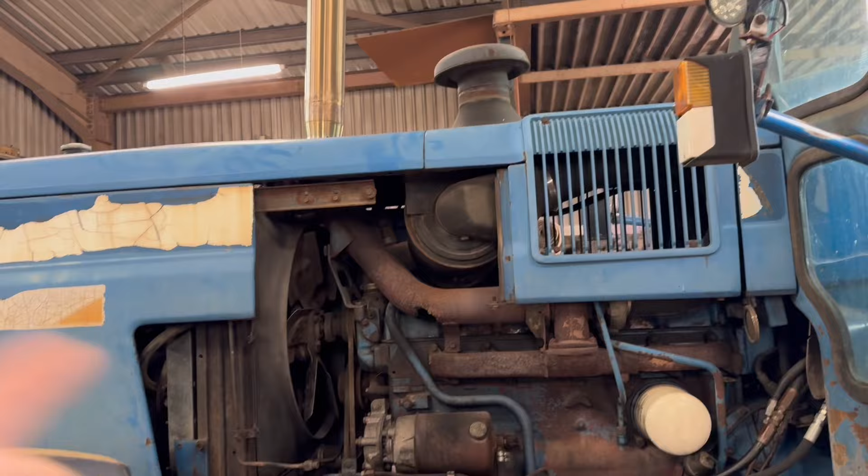So yeah, we'll try and get this off first. I warmed it up at the back. It won't come undone. And I've also warmed the bolt up itself. Sometimes that breaks the rust free. It's turned a little bit, but I think it's just the head that's going to snap off. We'll keep turning it backwards and forwards, till it either comes undone or it snaps off.

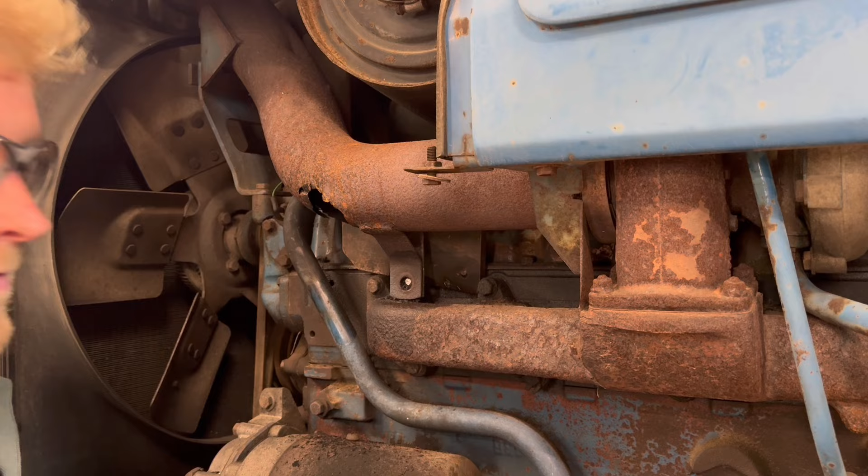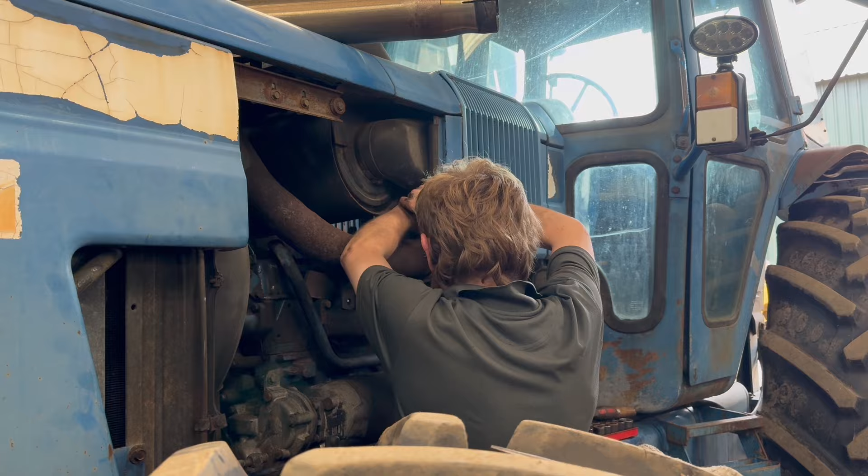Yeah, so it just snapped off. Right, so that's that off. So there's a V-band clamp that holds that on to the end of the turbo. And then 2 bolts there, and then the exhaust clamps on the top. So hopefully that new one should be the same. And then that just clamps onto there, onto the V-band.

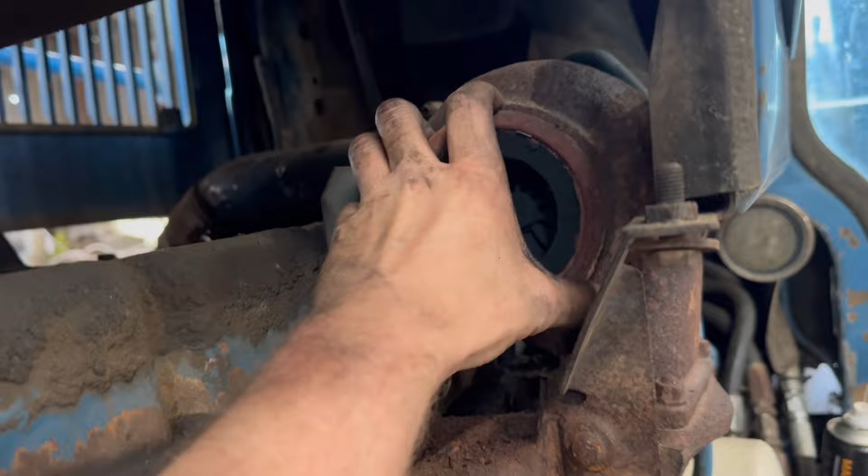I think the turbo seems alright. Bit of rust and stuff in the bottom of it. No wobble in it. Just wants a bigger one on. So yeah, I think we'll have to drill that out because it looks like it's now part of the manifold. It looks like it's that rusted in. So I think I'll grind it flat, centre punch it, and then just drill it and tap it back out again.

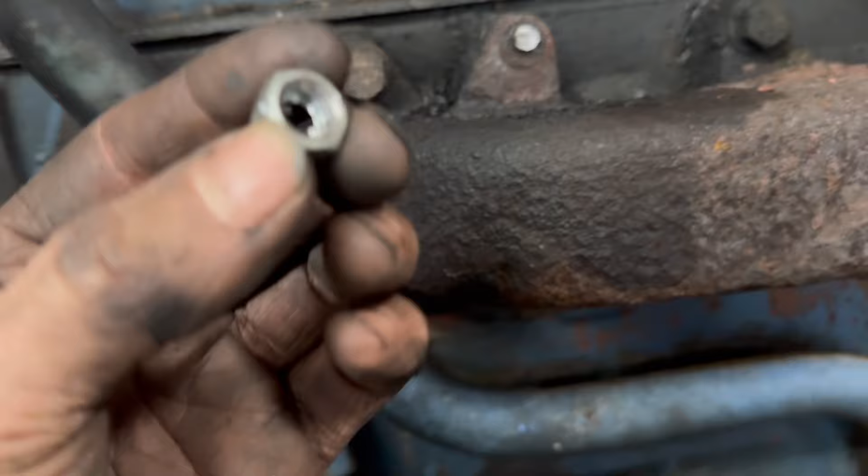Actually, before I go to the hassle of drilling and tapping it, I might just try the old trick of welding a nut on the end and then get this bit hotter and see if it'll come out. So I've just drilled and chamfered the back of that nut out a little bit so it fits over there nice. Now some people weld the washer on first and then a nut onto the washer, but I'm just going to weld that onto there. And then get that bit nice and hot.

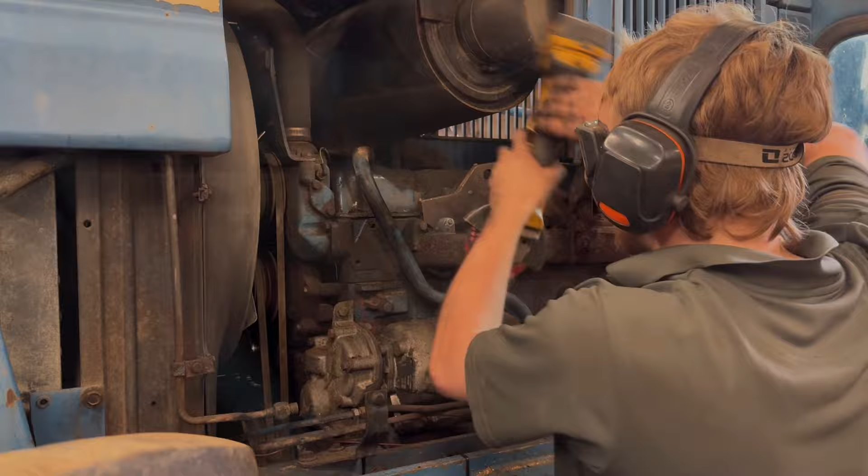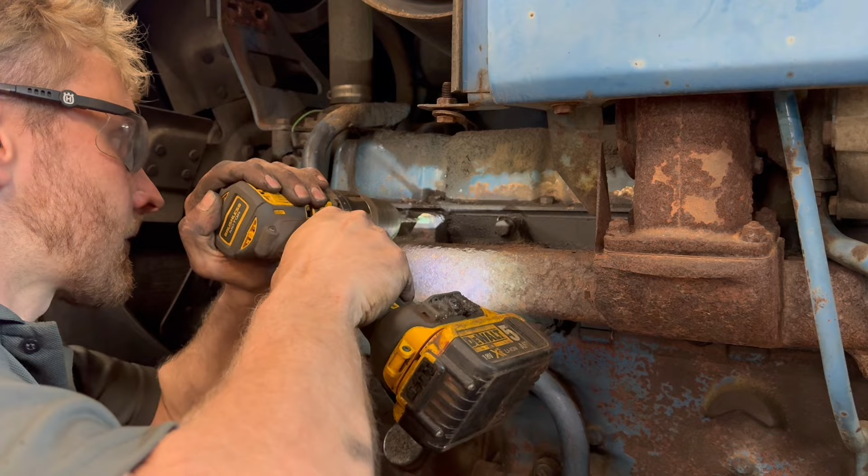Yeah, no, we'll just grind it off and drill it out. It's not going to come out. I think we managed to keep pretty much in the centre. So I went through with a 3mm to start with, and then I went 6.5 just to see whether I was in the middle or not. And now I think I'll go through with an 8.5 to tap it out to a 10mm, M10.

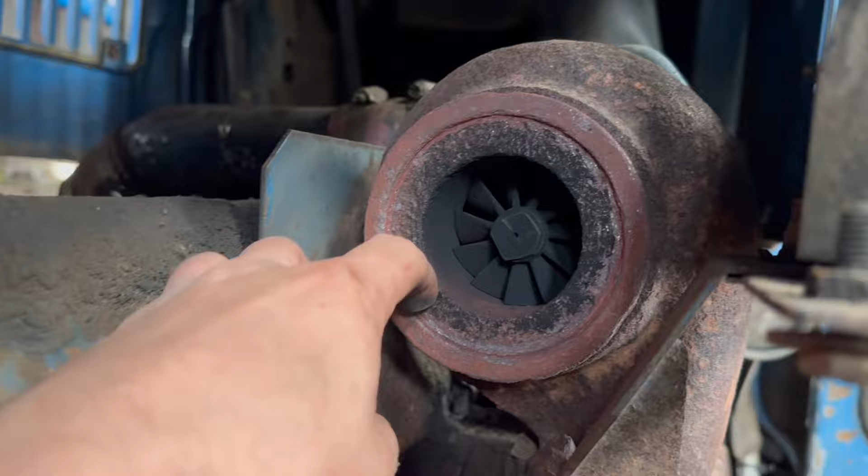Clean that flange up as well. It was a bit rusty. I've cleaned up there and then chiseled some of that rust out on the inside because there's like a shoulder that sits into there on the new one. So yeah, good to put that one back on now. There's a bit of a shoulder that sits into the turbo.

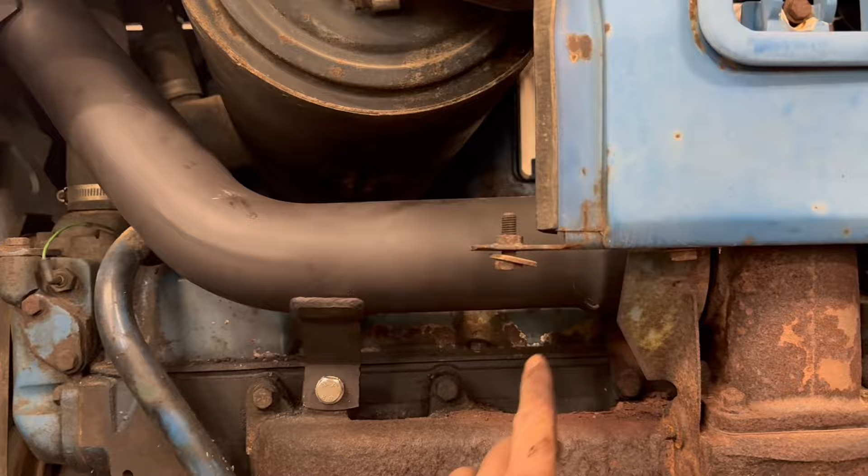The exhaust back on. It actually fit pretty well for a replacement part. Sometimes replacement parts don't always fit that well, but that fits spot on. And then the straight pipe back on again. So that's all sorted now.

I have had this tractor in before. I did a video on it. I did the front hub seal on this side. New hub seals. Was it on this side? I think so, yeah. New hub seals, and then the shaft that the seals seal onto was worn, so I had to build them back up. It's not leaking anyway, so my repair must have worked. Yeah, that's that done. I'll take that out and get on to the next job.

So we've got a little fabrication job to do this afternoon. It wasn't a job that was on the list, but the customer says they need it as soon as possible. So it's a nice little job for me to do this afternoon. He's brought some steel in, and I'll show you what's to make. He's putting like a thumb on his digger, and he wants a bracket making that welds onto the boom that holds the linkage for the thumb itself.

When I say thumb, it is literally a thumb that goes onto the boom, and then when you crowd your bucket round like that, it comes in against the thumb and you can pick stuff up with it. So yeah, a bit like that. So your bucket, and then this is the bracket, sort of like what I'll be making. And then he's brought the link that joins onto it. There'll be 3 holes in it, so you can have it in 3 fixed positions, depending on how far you want to be going with the bucket before you're grabbing onto stuff. And this is the link that he's brought for it, so I can get a measurement off the pin size. So that's basically what I'm going to be making.

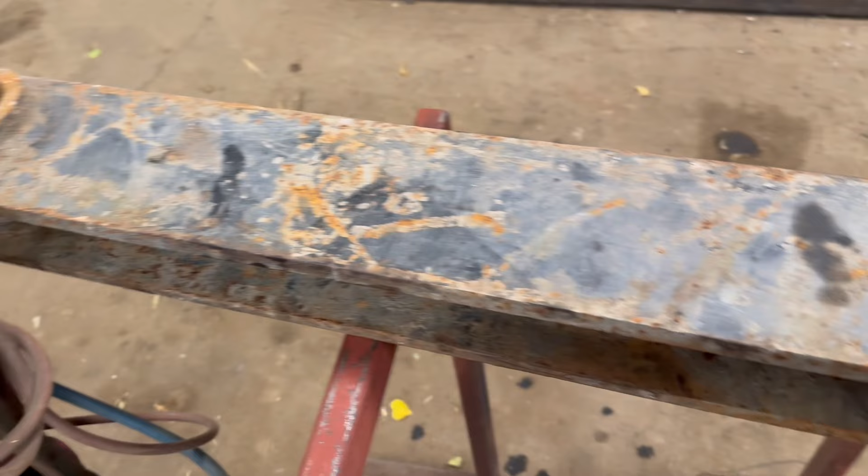Nice and simple. There'll be 2 of them plates, one at that side, welded on, and then rounded round, so when you weld it on, it's not a straight weld across. I've seen them crack across there before if you just weld them straight across. The base plate out of that, that's wider than it needs to be anyway. He wants it to be 8 inches wide to weld onto his boom. And then these will be the side plates.

So I have to plasma some holes in here. It's a 70mm pin, and I don't have a drill or a reamer 70mm. So I'll plasma the holes out first, and then I'll put it on the milling machine and go through with the boring head to get them out to 70mm. So that'll be to cut in half, and then corners to round off as well. Get that set up, cut that first, and then do the other bit.

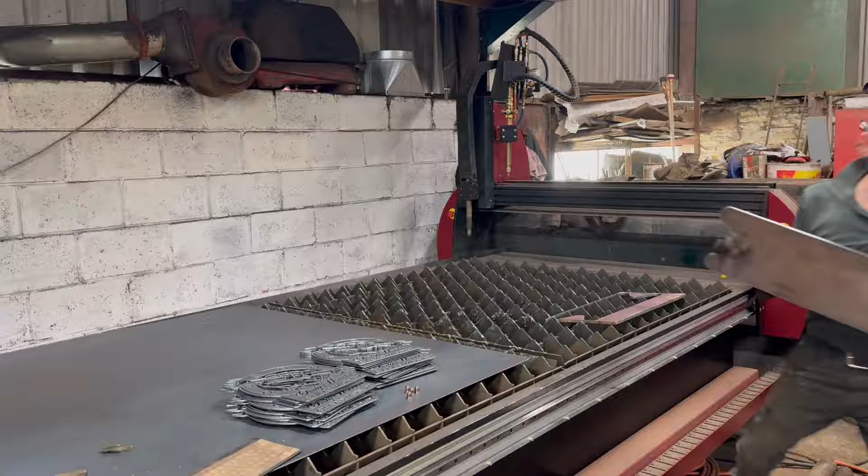So that's that bit cut out. Just wants cleaning up now. This bit, we'll start by cutting it in half, and then I'll have to mark again, line it up where the centre is to cut the 3 holes in it. Then I'll try and cut the little corner off as well with the CNC plasma. I can't take any off the width because it's already the width it needs to be. It's 150 by 15. It'd been easy if I could have taken a bit off the width, because then I could have cut the whole thing out from scratch, but I can't. I'll try and do it with the plasma, if not I'll just do it by hand.

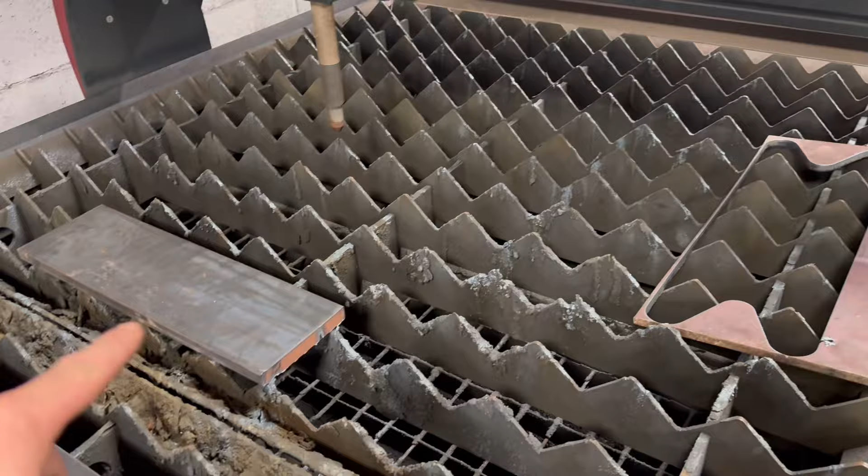Right, so that's that one done. There's a bit to trim off there. It's a little bit longer than what I measured it, a few mil. So there's a bit to trim off there and a bit to trim off there. It probably would have been quicker and easier to start from fresh with a bigger bit of steel rather than trying to line up off this, but that's what the customer supplied, so that's what he wants me to use. So we'll do the same with that one now. Line it up, centre mark it, line the torch up, and then cut the 3 holes and the corners off.

So that's the second one done. That was a lot quicker, to be fair. That only took about 5 minutes to do the holes and the corners, so that's saved time. The first one took a bit of setting up to get it in the right place, but once I got that set up, it was easy enough. So we'll clean them up, tack them together, then put them on the milling machine and run the boring head through and bore them out to 70 mil.

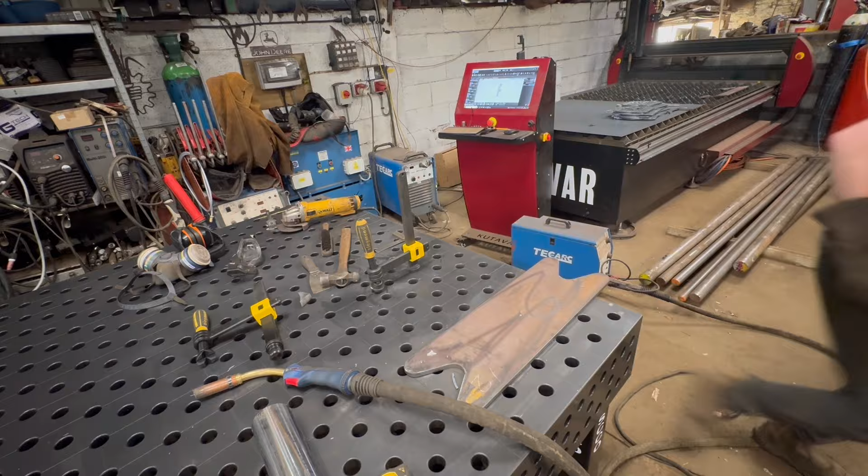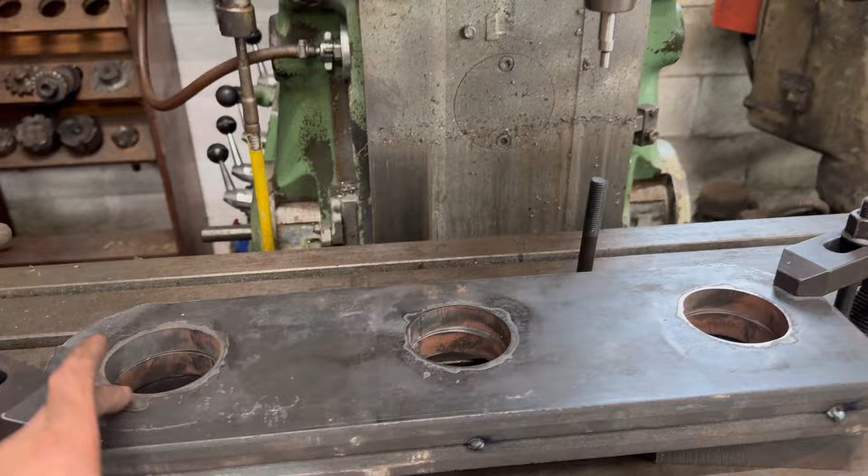That's all clamped on there now. So I use my edge finder to find the middle of this hole, and then I know my distance between there and there from when I drew the pattern in CAD. So then I'll just use my DRO to move on the right amount from there to there.

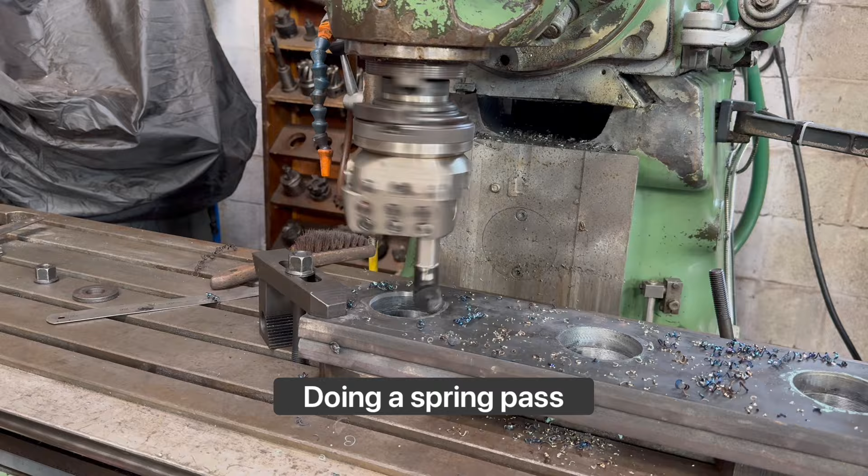Right, so that's them 3 bored through. So the middle one is not cut very nice, but I got that one set to 70mm, and then I went to that one and then just bored that straight through, same as what it was set out for the middle, and then same with that one.

And then this one I've just done another spring pass through it, and it's taken a little bit more out, so I think I'll go back to that one and just take another sort of clear run through it, because it's a little bit tight as that one. It's not quite cut out all the way around the hole, but it'll be alright for what it is. So yeah, I'll go back to that one and do a spring cut through there.

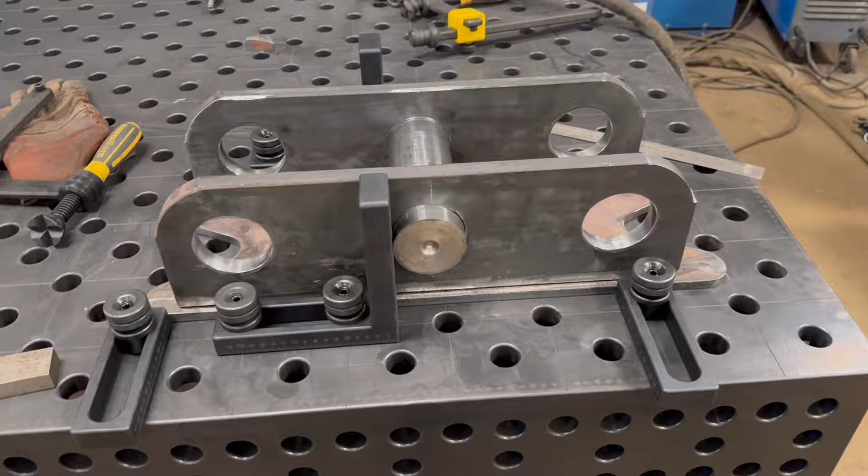I've got this set up on the bench now. It's the first time I've actually used these fixtures. So yeah, I've got them on there, so I know that the bottom plate is going to be parallel, and then I've got these set up for the pin, so then the pin is pushed up against them. I suppose I could clamp them to them if need be. So I know that the bottom plate and the pin are both square, and then I've just measured my spacings.

I need 145mm in between there, because the other bit that goes in there is 140mm. So we should be good at that. So I put a few tacks on there, and then I think I'll weld some bits across here to stop that splaying out when I weld it. It probably will do a little bit, but there should be enough tolerance on the holes to allow a bit of twist.

Right, so that's that tacked up there, and I've got them welded across the top. Pin fits nice in all 3 holes. So hopefully it'll fit nice once it's welded up. They're a bit chattery, some of them where it's cut. I need to get some better boring bars for the dividing head, not dividing head, what do you call it, boring head. Yeah, so we'll get that welded up.

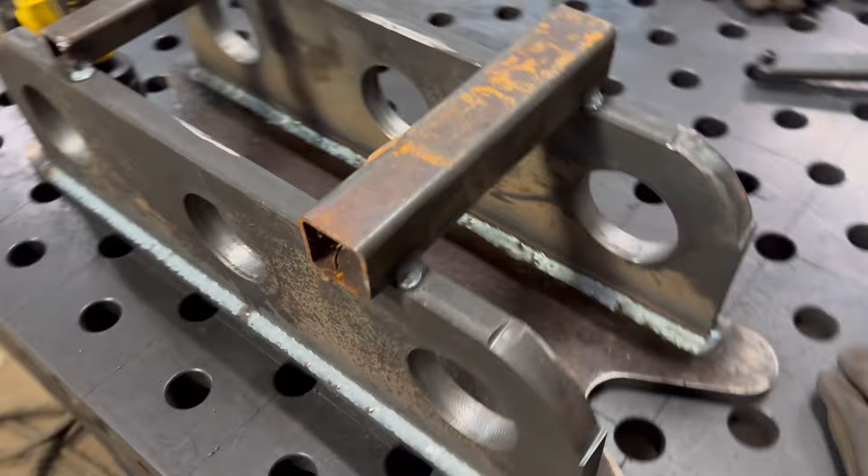Right, so that's all welded up now. Just needs to cool down. So I'll leave them on until it's cooled down and then I'll chop them off. Hopefully it won't move too much. So yeah, while it's cooling down, I need to drill this pin. The customer has supplied this bit of pin, but it's induction hardened chrome bar. It's not just normal chrome bar, which means it's going to be difficult to drill.

So I've tried to centre punch it there, and it's just sort of blunting my centre punch. I haven't got any carbide drills like what you're supposed to use to drill it. So I think what I'll do is I'll heat up a spot there to soften it, and then do the same on the opposite side, heat that up and soften it, and then hopefully I could be able to drill it then. It needs drilling for the bolt to stop it coming out. Now I've cut that collar, I'll weld that collar onto the other end.

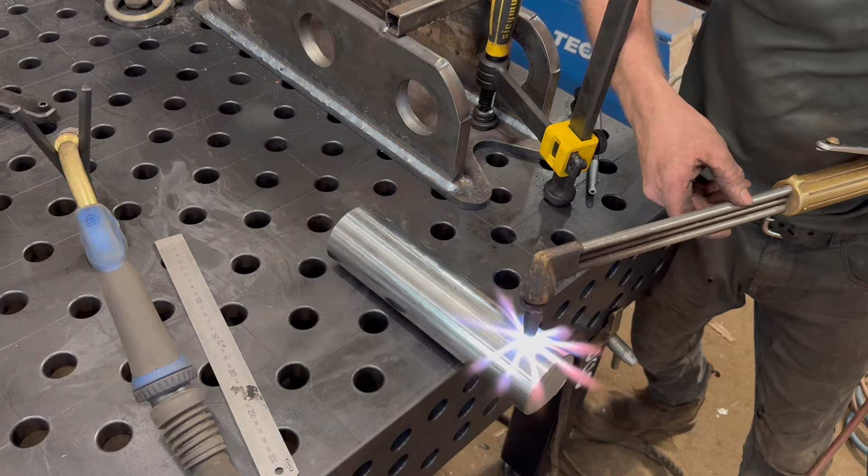I'll have to wait for that to cool down as well now. Yeah, hopefully that should have made that spot soft now. Same on the other side, and then drill right through. I think I'll drill it through for 16mm, 16 bolt.

Right, so that's the bits of box chopped off. That pin fits. So I'd be lying if I said I didn't have to heat straighten it a little bit. They did bow in a little bit too much, so I had to turn it upside down, and then I ran heat down the inside, on the bottom where that inner weld is on both sides. And anyway, that's made it fit nice now. That other linkage is 140mm, so there's a couple of mil spare, so that should fit in there nice. So that's that bit sorted.

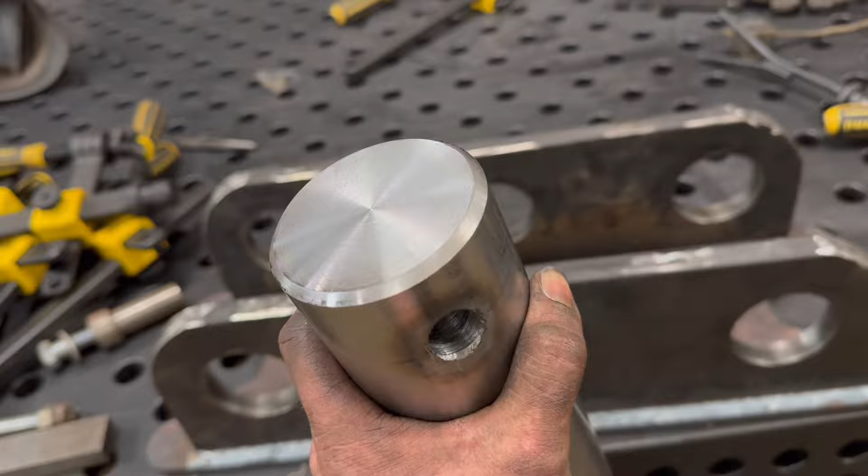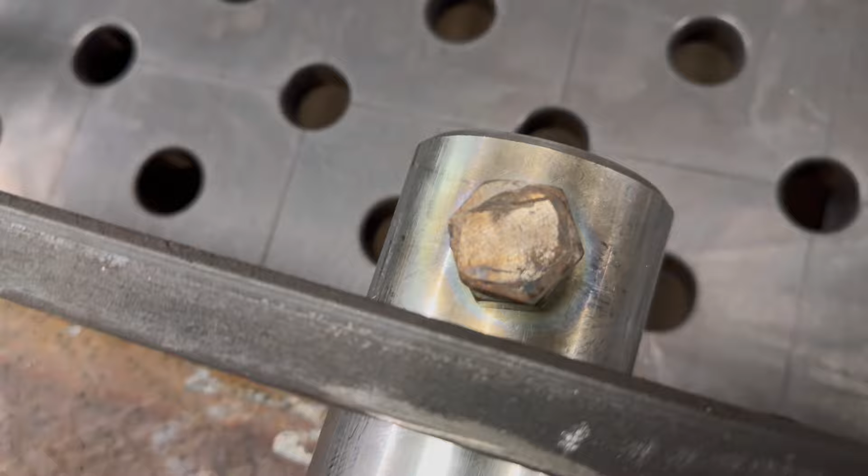So that's the pin drilled all the way through. I've squared the end off and put a chamfer on it, chamfered that end. So the last thing to do now is just to weld that collar on the pin like that. Somewhere like that, I would have said.

Right, so that's that done. So that's that link into there, fits nice and tight. And then he's going to weld, I think, well, I don't know who's going to weld it onto his digger for him, but he just wanted that bit making, so yeah, that's that done.

Holes are a little bit chattery, but just need some better tools, I think, or something for me boring head. But no, that was a nice little afternoon job.

I've got another job to do now that I didn't intend on doing this week, but they rang up and said they need it, so yeah, I'll get it done so they can have it back. So it's on this JCB, so you'll have seen this before. This has been in a video before where I altered the thing on the front to make it fit onto the quick hitch that it's now got on it.

So what that does is it picks up telegraph poles, electric poles like that with a grab on the front, and then it turns them on their end like that, and then it lowers them over the top of the cab, and there's a frame at the back of the cab, and the telegraph poles sit on that frame and are held in a grab at the front, so then they drive them to wherever they need to be and then lower them down into the hole.

The trouble is now, because it's got brackets on it rather than that red thing being fastened straight onto the front of the digger with pins, the geometry must be slightly different. So now when they pick the pole up, it doesn't sit onto that frame at the back. It doesn't go down far enough. So there's a bit of steel making a V shape on the top of there that I need to cut off, cut a new one out, and then weld it on. So it's a nice simple job, it just needs doing.

So before I bring that into the workshop, I'll fetch a bit of plate round, a bit of 20mm plate, and we'll plasma a new triangle out that's bigger than the one that's on it.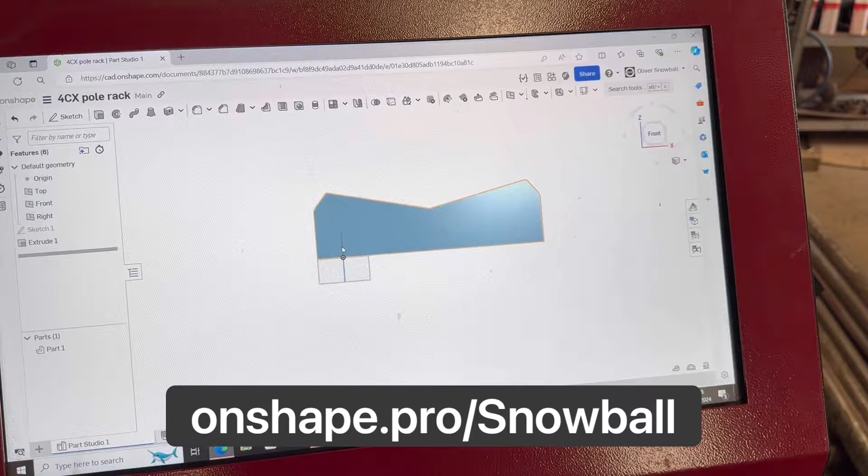So I'll get that cut out. I've got some 20mm sat on there now. I've been dressing some of these up this morning as well and packaged them up. I've sent 12 out this morning. I've still got the rest to clean up, but I've run out of cardboard to package them in, so it should be coming tomorrow, so I'll get the rest sent out tomorrow.

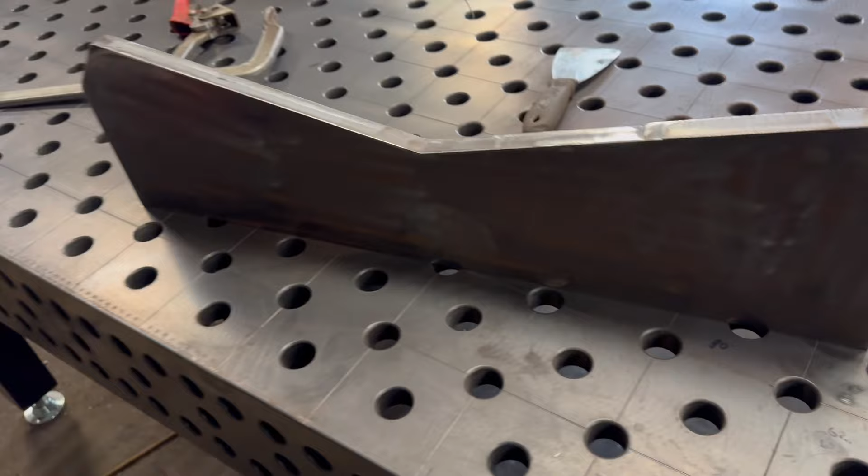So that's that cut out. Give it a clean up, knock the dross off the back, and then a bit of clean up with the grinder. That's what it looks like before you clean it up. So it's cut that really nice.

So yeah, we need to chop the old one off the top of there now. So I think I'll get the man basket on our JCB and work out of the man basket. I'll put the ladder up against the side of it and then I can get into the man basket by the ladder and then work out of that.

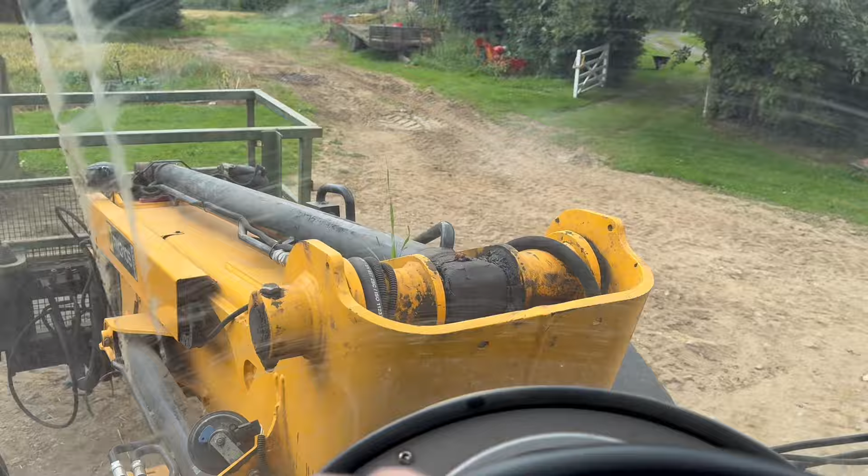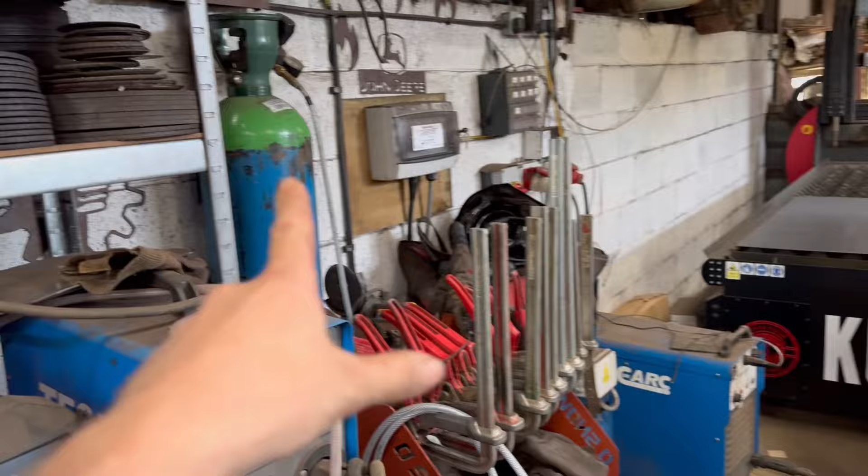So I think to weld that on, I'm going to use this little Jasic. This little Jasic has Innershield wire in it, Lincoln Innershield wire, which is like a gasless wire, which saves me having to run a gas pipe up there because I've only got that gas bottle. I need to get a longer gas pipe really, but I've only got two little short extensions, so I'd have to get that gas bottle out, drag it all the way over there, connect it up. I think I'll just use that for easiness.

So everyone usually slates gasless wire, but if you buy the good stuff like that, I can't remember how much it was now, it was like 100 quid for a 5 kilo roll. So it's fairly dear stuff, but it is pretty good. It's just like stick welding, but with a MIG.

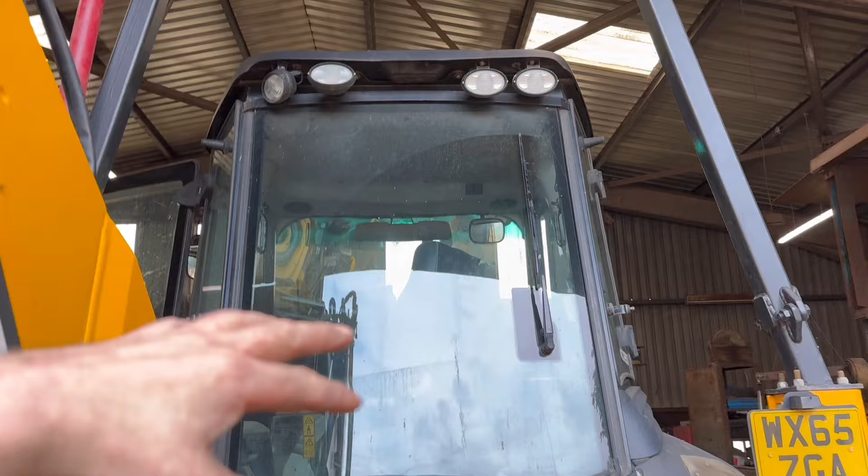So to protect the back window, well, I was thinking I could open it, but it still sort of sticks out the back of the cab for when I'm welding. I don't want to be getting weld splatter on the window. So I have a bit of plywood there. I'm thinking if I just put that on the man basket, lift it up and slide that onto the roof, and then have that sticking out a bit.

I could do with some proper weld blankets for stuff like this, but I haven't got any yet. So yeah, we'll use that bit of plywood, I think. And then when I knock that bit off, I don't want to knock it off and then drop it on the window and smash the window. So that bit of plywood will also stop it dropping down, hopefully.

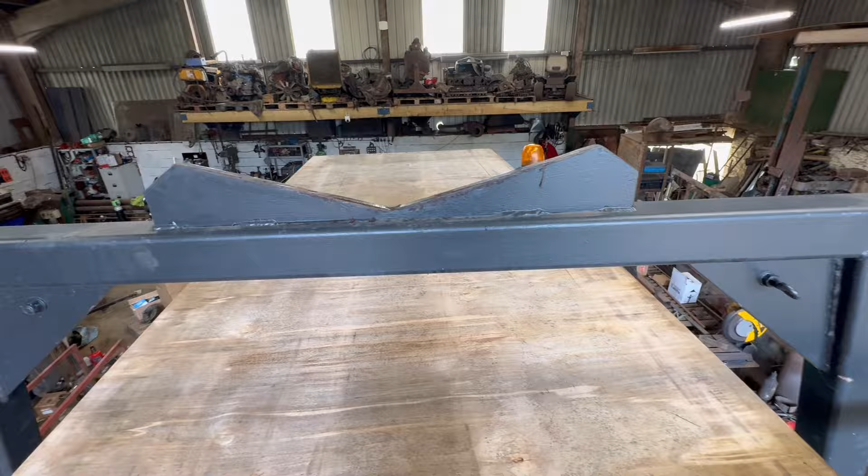Yeah, so that bit of plywood works great. Stops any sparks dropping down through there. So there isn't much holding it on. There's only 5 bits of weld either side that holds it on. So I'll just chop them off with a slitting disc in the grinder, I think.

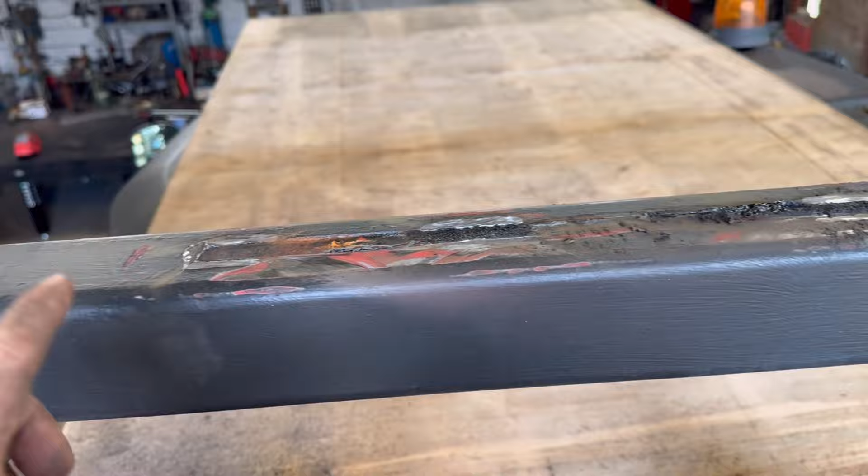That's the old one off. I don't know what I painted it with. If I had painted it with some real stinky paint, or it's creosote that's run off the new poles down underneath.

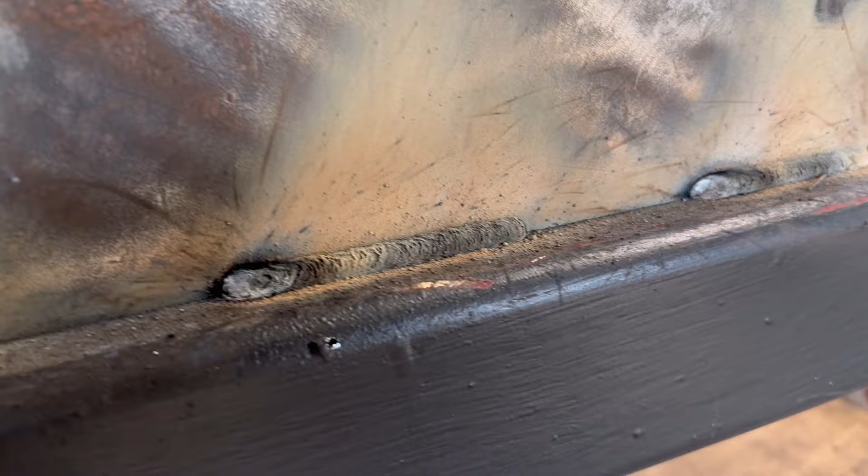So that's that welded on now. I've just stitch welded it on the same as it was before, because there isn't much force on it that way, it's mostly down, just weight sat on it. And that's what the welds look like afterwards. It leaves like a slag on the weld. So I'll clean them up and show you what they look like afterwards. It is a bit like stick welding but with a MIG. And then that's the other side.

And then that's what they look like after they're cleaned up. Now a little bit of porosity in the middle there, because the bit that gets stuck on the end broke off and ended up in a weld, and it's made a little bit of porosity. But the rest of them are spot on.

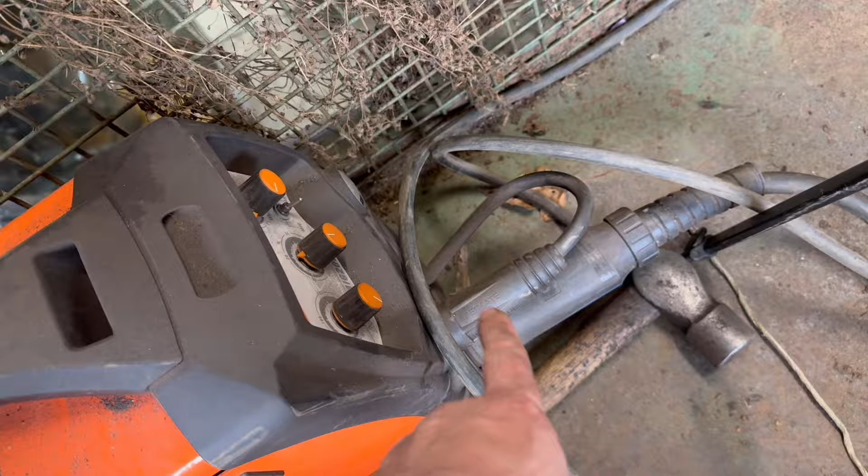You always get people slating gasless wire saying it's rubbish, but if you buy the good stuff, it's pretty good. It saves a lot of hassle having to bring a gas bottle up here or run a pipe down to a gas bottle. So the reason why I got it was for outside jobs, but I don't really do many outside jobs. And the only thing is you've got to have a welder that will run reverse polarity, so the earth is positive and the wire is the negative.

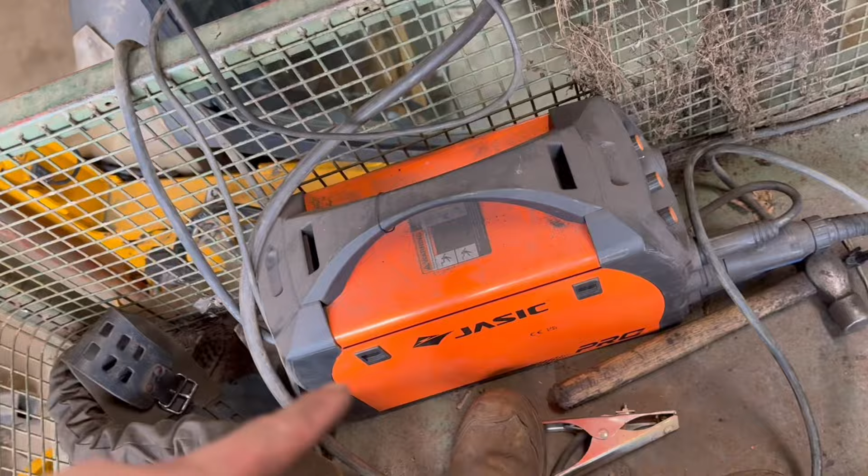I was running it at 19 volts, 19.5 volts and 5 meters a minute wire speed. It's a good little welder as well, I like that little chassis. A bit more basic than the other one that I got, but it's still good. It's nice to use and it runs nice. I did actually buy that one myself, I didn't get it given like I did with the other one.

So that bit there, I'm not going to grind it back out because it's not really worth the time doing it. It would rip the box section before it broke the welds, so for the sake of a tiny bit of porosity in the middle, it's not worth grinding it out. So yeah, I'll paint that with red oxide and then I'll paint it with black.

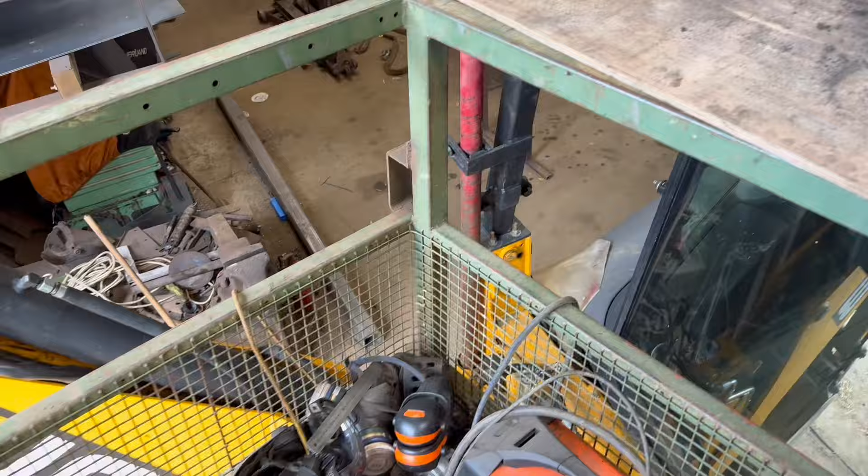Alright, so that's that done then, all painted. Should be strong enough. There'll be a bit more force on it now that they're taller, but like I say, there shouldn't be any force that way, it's all just sat on it, and poles are not that heavy anyway, I don't think. So that should do. I'll pull my bit of plywood back onto here again, and then get everything taken out.

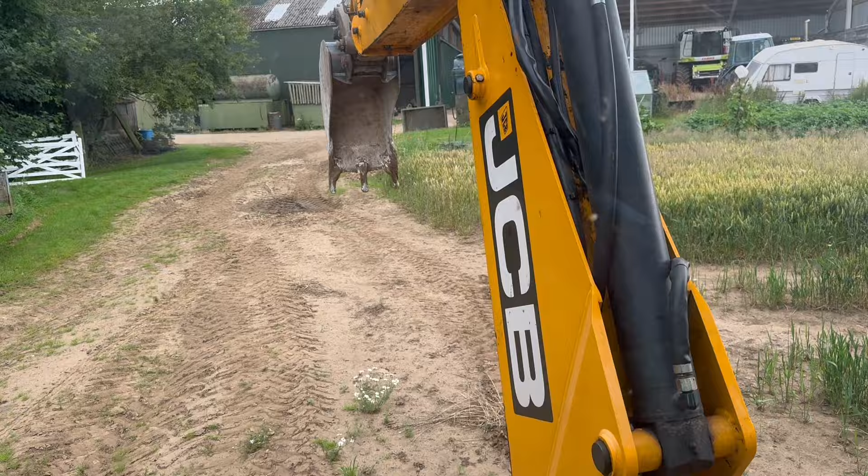I love having a little play about on diggers. Tempted to dig a hole, but I think I'd get in trouble if I dug a hole. It's not easy driving with one hand either. It's pretty cool when you want to be the other way around, you just spin your whole chair around.

Right, so I think I'll make that do for this week's video because it's Thursday afternoon now and I really want to go to Welland Steam Rally tomorrow. So yeah, I need time to get this video edited and it's like a 4-hour drive down to Welland. So yeah, I want to be setting off in good time tomorrow.

So that was a few of the smaller jobs ticked off the list. Wasn't really the jobs I wanted to get done, but I'll get them done next week.